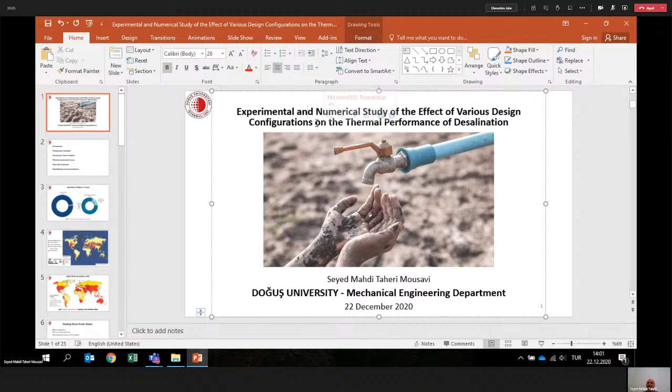Today, I'm going to give a short presentation related to water scarcity, which is shown in the figure. Water scarcity is one of the biggest issues, let's say problems, that humans have faced during the last decades. And of course, we are looking for some solution. Today, I will talk about the solution which is known as desalination technology.

Now, my presentation is divided into 6 main sections. Firstly, I will talk about water scarcity. I will talk about the need. Later, we will consider some sources of fresh water, and of course, we need some discussion related to desalination. The desalination definition will be considered. As we know, desalination means removing dissolved salts from the water.

The thermal desalination process can be categorized in many parts, but 2 sections of them, solar still desalination and humidification-dehumidification, will be considered during this presentation.

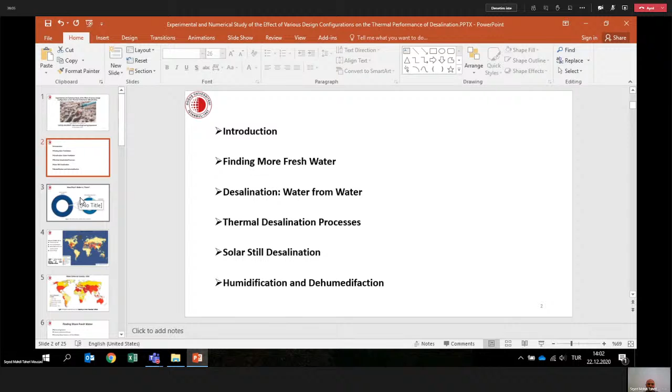Before considering water scarcity, I think it is better to give some idea about the amount of water on our Earth. Almost 97.5% of the Earth's water is ocean water. But it should be mentioned that almost 75% of the Earth is covered with water. But of course, all of this water is not available for us as drinkable or potable water.

Now, as I mentioned, 97.5% of the water is ocean or sea water, which is not drinkable, and the remaining 2.5% consists of 2 sections. Firstly, permanent snow or glaciers, and second is ground or surface water such as rivers, lakes, and shallow wells. But how much of this water is available for us?

Of course, the snow or glaciers are not available for us, and the available part is almost 0.5% of the total water. It means that there is scarcity of water.

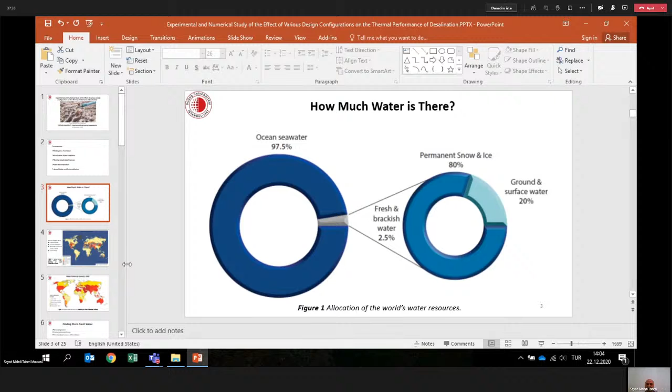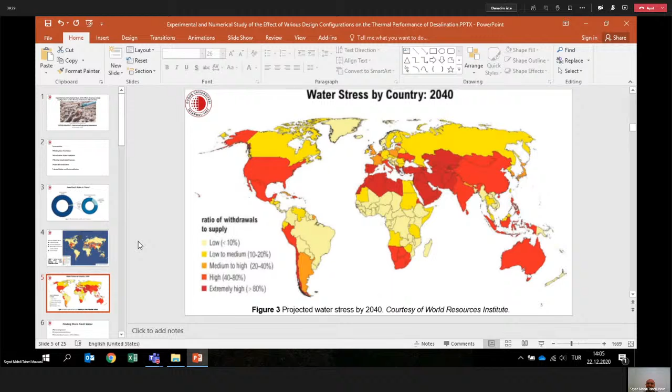Now we want to talk about finding more fresh water. There are almost three main sources of fresh water, or potable water. One of them is relocating water. Another is conservation and reuse of water. And the last one is developing new sources of water.

For relocating water, we can give this definition: transporting water from a water-rich area to a water-poor area. We have one famous example around us: transporting water from Mersin in Turkey to Kyrenia in North Cyprus. This is one example of relocating, or let's say transporting, water.

How about the others? Conservation and reuse can be introduced by developing the culture of people. But we will consider developing new sources, since we need some new sources.

If you ask me why we need new sources: during the last decades, especially after the Second World War, we have had growth in population, but simultaneously the demand for potable water increased twice. It means that, according to the previous pictures, we are in water scarcity, and we will be faced with even more water scarcity.

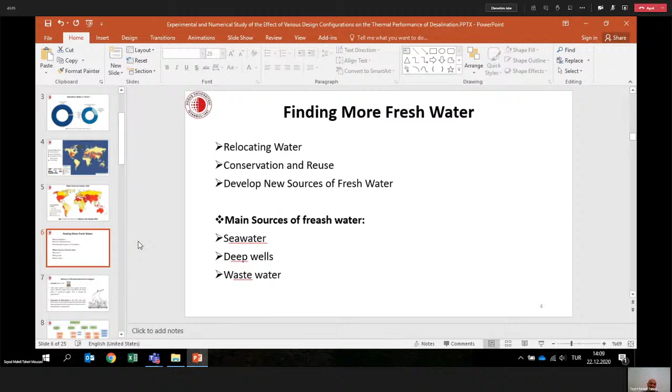For wastewater, especially in industrial sections, we can consider this method. We can have some treatment to reuse this wastewater from industry, and I think it's better to talk about the history of desalination technology.

Desalination technology is not a new topic. According to the history of desalination, Aristotle gives the first definition of desalination. He says that salt water, when it turns into vapor, becomes sweet, and the vapor does not form salt water when it condenses again. This is known now by experiment—Aristotle got this idea according to experimental methods.

Later, in AD 200, Alexander of Aphrodisias gave one account of desalination history. He said some sailors at sea boiled seawater and, by suspending a sponge inside the boiling seawater, they absorbed some drinkable water using this method.

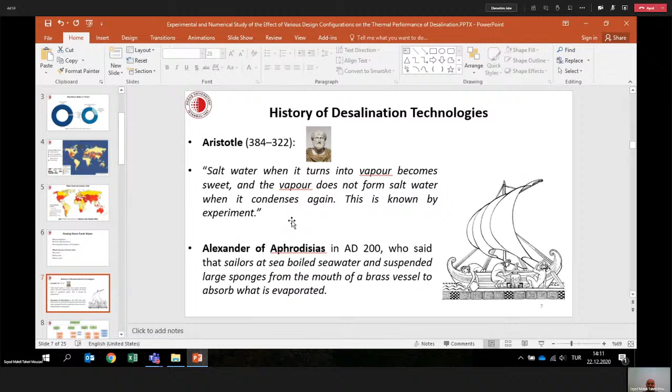The desalination process can be categorized from many points of view. One way is according to the source of energy. If the source is thermal, we call it thermal desalination, or chemical, or nuclear, or solar. Another method is using external devices or without using them.

For example, we can divide this into active or passive categories. In passive, known as the conventional solar still, there are no extra devices connected to the desalination system. These extra devices can be a solar collector, photovoltaic systems, or the waste heat of power plants.

Here I wanted to categorize this according to a flow chart. The desalination process can be categorized into 4 main sections: first, thermal method; second, crystallization; third, membrane; and last, new technology. During this presentation I will focus on the thermal methods, which can be categorized into 6 main sections.

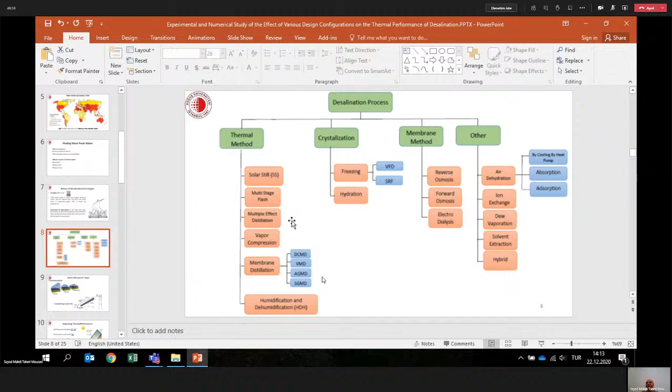These sections are: solar stills, multi-stage flash, multiple effect distillation, vapor compression, membrane distillation, and humidification-dehumidification. During this presentation, the solar still and humidification-dehumidification methods, which are inexpensive, will be considered.

Here we can see solar stills and their types. We have many definitions for solar stills and for their types. I've brought two types here: conventional solar still, which depends on the design, and cascade type solar still, or even wick solar still. During this presentation, conventional solar still, or the single slope type, will be considered.

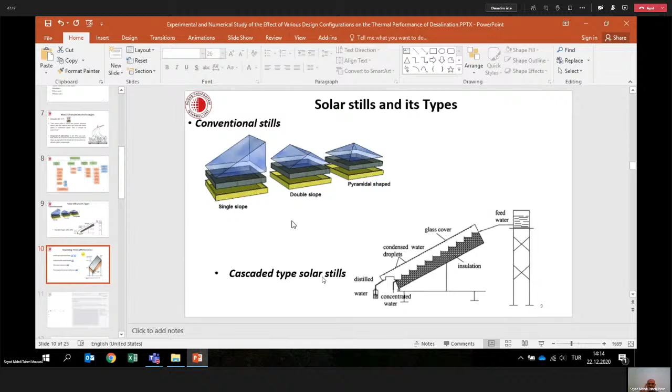Let's consider one conventional solar still. The conventional solar still, illustrated in this figure, consists of some parts. The first part is the basin liner, the second is the cover plate, and the third is the insulation section to prevent heat losses from the device, or solar still.

One of the main disadvantages of the solar still is its thermal performance. According to my survey, it's not greater than 26%—I mean the conventional solar still has about 26% thermal efficiency, which is not suitable.

During the last decades, research has been done to increase the thermal performance or thermal efficiency, and also to increase the daily productivity of the solar still. I've brought some examples here, such as utilizing a suspended plate inside the basin water, reducing the water depth, using an external condenser, or utilizing external and internal reflectors.

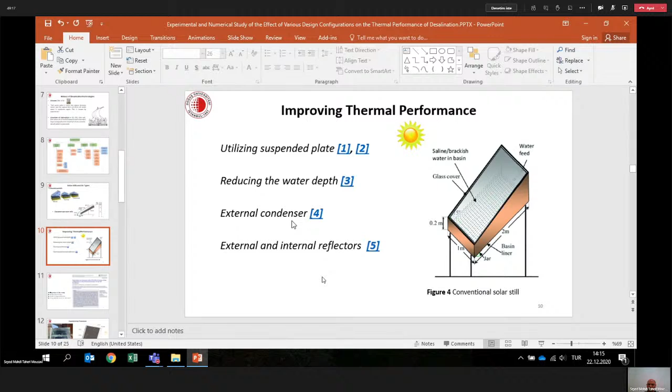According to these surveys, during the last months I considered my previous work and published an article related to solar still desalination, published in September 2020. In my study, I considered some parameters and their effects on the performance of the solar still—these parameters were the depth of basin water, the depth of the suspended plate, and utilizing an internal mirror in the side walls.

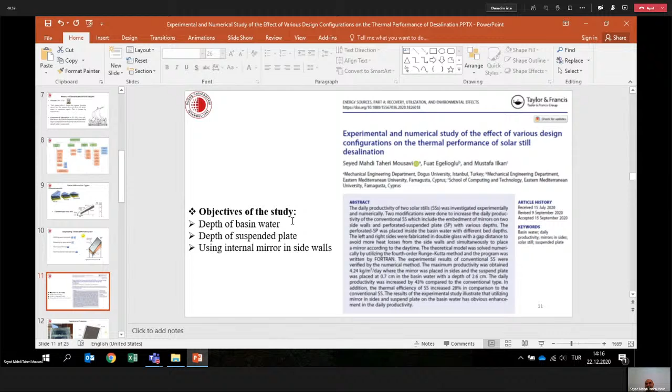Let's consider our experimental setup. I fabricated almost 3 solar stills, but one of them was broken during the experimental process, so I just considered 2 of them. During the experiment, some effects were considered.

We utilized a perforated suspended plate with 210 holes, each with a diameter of 0.3 centimeters. Why perforated? Inside the basin water, we used this to give the water the opportunity to flow inside the basin water.

The other modification in my case study was utilizing glass instead of something like wood, which is used in the conventional design. Why did I use glass as a material in my case study?

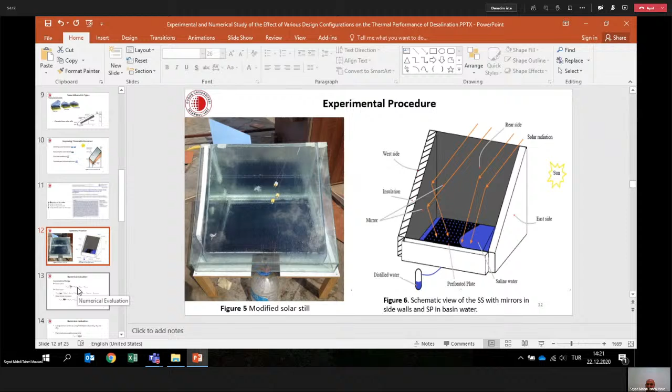Of course, when we were at noon time, the inverse procedure was processed. That was the experimental procedure. We also did the numerical evaluation.

For the numerical evaluation, we have to consider the conservation of energy in 3 distinct sections: the basin, the glass cover, and the water inside the basin. I put the conservation formulas without more details.

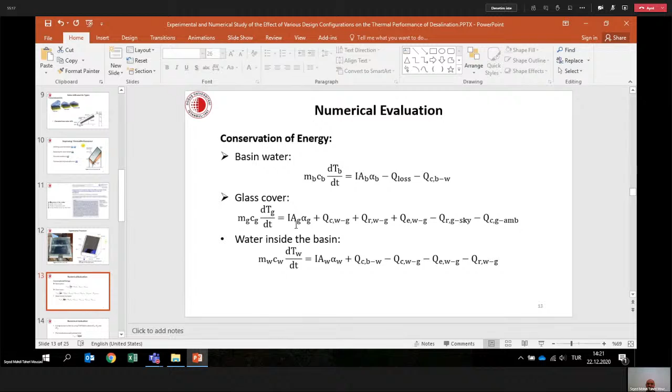The aim of this numerical evaluation was calculating the temperature of the basin, the temperature of the glass, and the temperature of the water, using Fortran language. Later, the instantaneous daily productivity was calculated according to this formula.

Daily productivity equates to the amount of evaporated heat from the water to the glass over the latent heat. The instantaneous thermal efficiency at interval times of 1 second was calculated according to this formula, where Ag is the cross-section area of the glass cover, and I is the solar intensity.

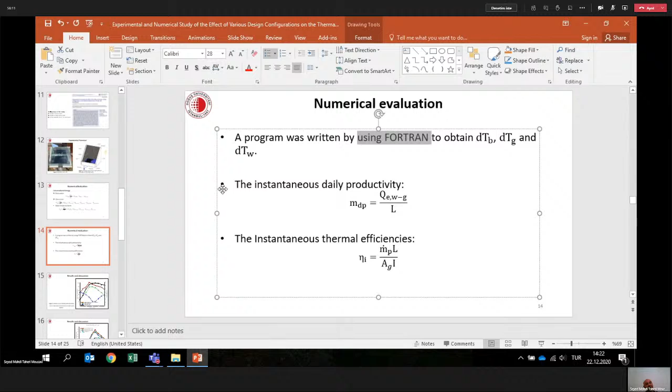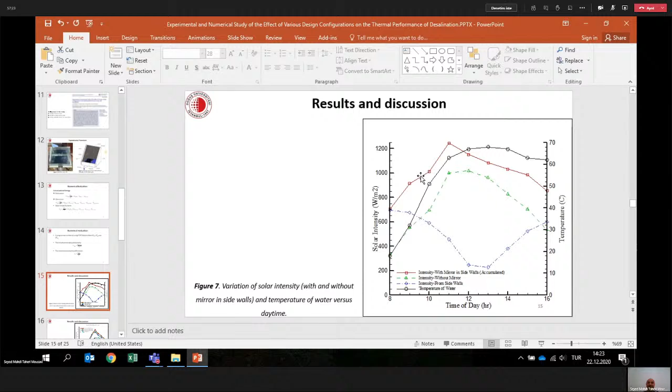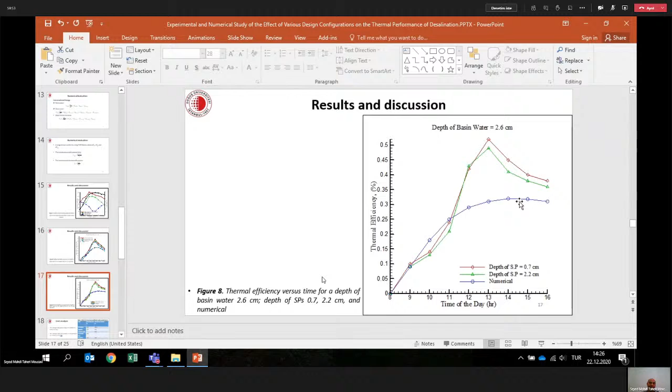For the first case of the study, I consider the cost analysis. One of the main objectives of designing the solar still is optimizing the cost.

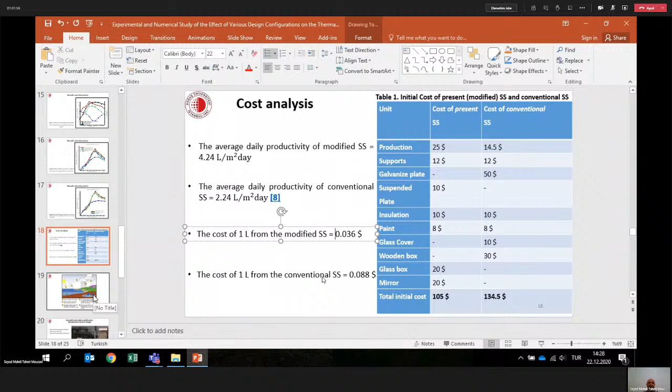Now I wanted to accomplish the case study as the first solar still study. Next, I would like to consider the second case study, which is my future work. But before that, I want to give some idea about humidification and dehumidification.

As we know, nature uses air as a carrier gas to desalinate seawater through the rain cycle. In the rain cycle, when seawater is heated, it evaporates. This vapor rises to some elevation and is converted into clouds. This procedure can be considered as the humidification.

The next procedure, dehumidification, occurs when enough water condenses and the drops become heavy. At this time, rain falls down and we see it as rivers or lakes, or it may flow back into the ocean. It should be mentioned that the engineered version of the rain cycle is exactly humidification-dehumidification.

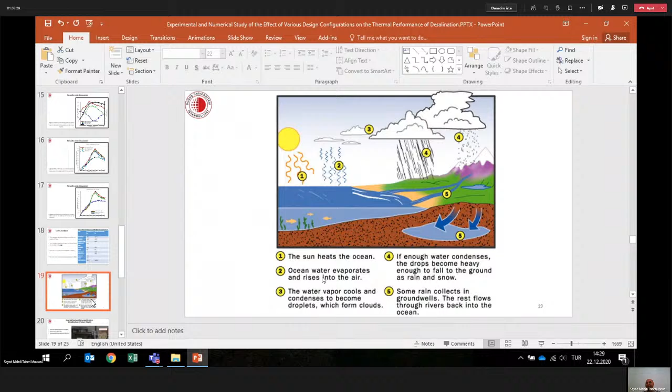The main reason for the poor thermal efficiency of the solar still is that multiple functional processes—absorption of solar radiation, evaporation, condensation, and heat recovery—are all occurring inside the same solar still, which leads to lower thermal efficiency.

To overcome this problem, we can use humidification-dehumidification, where humidification occurs in a separate device and dehumidification is conducted in another section, separating the heating of the water from the cooling of the air.

During this experiment, various temperatures of the water, various temperatures of the inlet air, and various air velocities were examined.

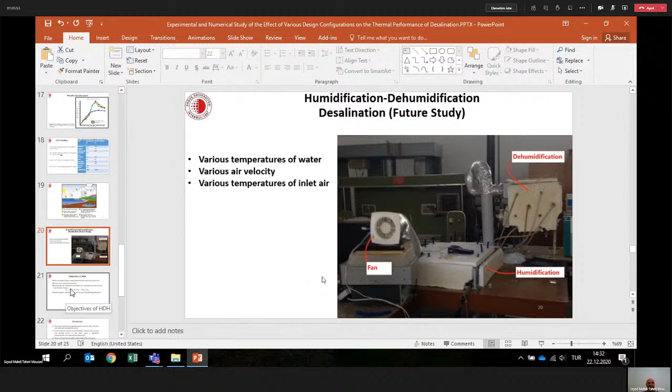This is the experimental section. After preparing figures related to this section, using the experimental method and calculating the water evaporation, I wanted to compare this water evaporation with empirical, or semi-empirical, methods.

The objective of this dehumidification study is determining the water evaporation from the experimental results, to create a new empirical correlation according to the modified John Dalton's theory, which states that the rate of evaporation equals A plus B times V, where A and B are constant values and V is the velocity of the inlet air.

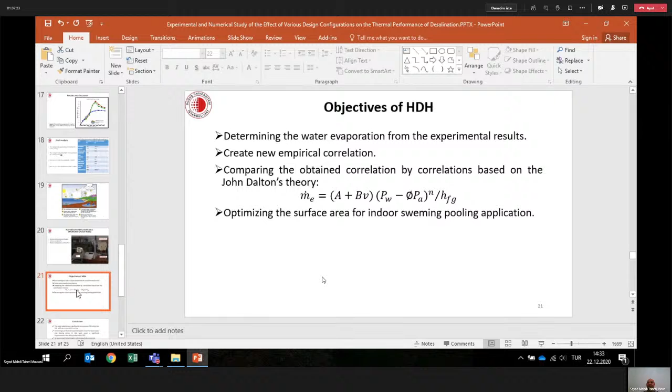This theory says the water evaporation rate has a proportional relation to the pressure difference between the water surface and the ambient air above it. I wanted to extract and establish one new empirical correlation, and then verify it with my experimental results.

I hope my presentation today helps with what I said at the beginning about water scarcity, and also about the development of new technology during the last decades.